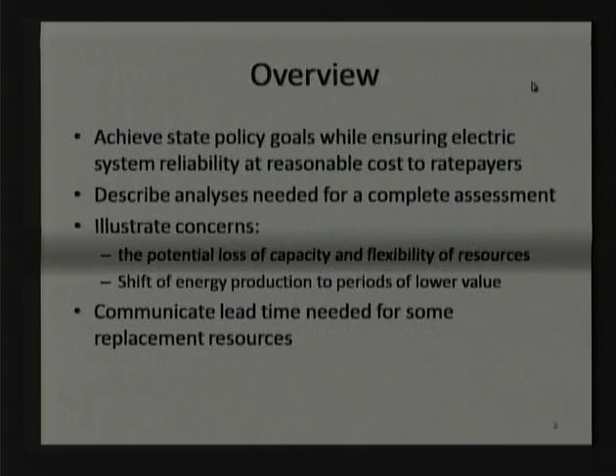Well, I keep turning this the wrong way. So just a little bit about balancing authority areas. 9 balancing authorities exist within California. 5 are fully within the state, and 4 are centered outside of California.

Essentially the western interconnection - there are 3 interconnections throughout the United States. There's an eastern interconnection, a western interconnection, and Texas. California is part of the western interconnection, and these balancing authorities are essentially areas where the operator must manage supply and demand instantaneously. It says here minute to minute, but essentially it's an instantaneous balancing of load with resources.

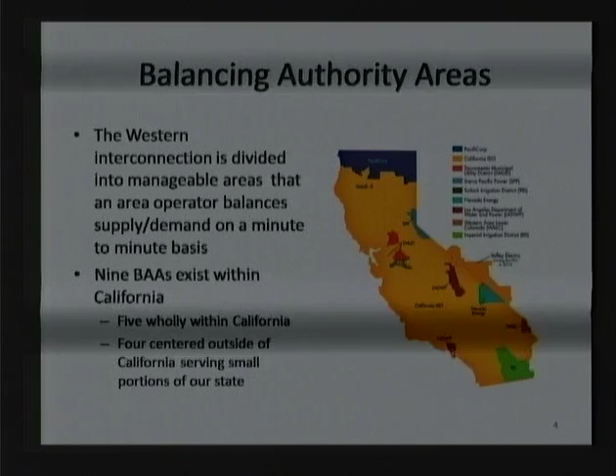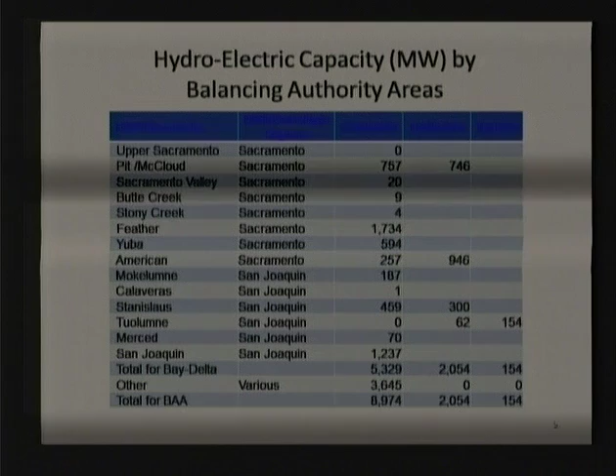This is just a slide. I won't spend a lot of time on this, but it summarizes the hydro capacity within various balancing authority areas. You can see the amount that would be within this Bay Delta plan, about 7,500 megawatts in the state, 5,300 megawatts in the ISO's balancing authority.

So I'm going to talk just a little bit about some of the studies that we currently do, at least from the electric system perspective, and Dr. Jassie's going to get into more about the specifics of how we have to model hydro within those studies and how that affects those studies.

So typically electric system planning has focused on energy and capacity to meet demand. But as we know, things are changing. Load uncertainty combined with increased penetration of variable renewable resources creates a need for flexible resources in addition to just energy and capacity.

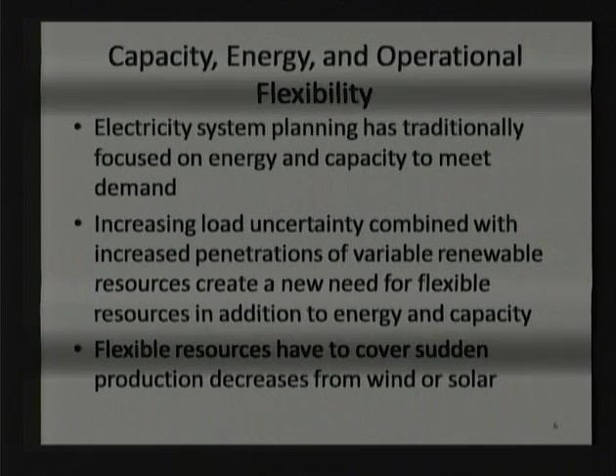Flexible resources like hydroelectric resources have to cover the sudden production decreases from wind or solar. Of course, all of this is even further complicated by things like the loss of plants that are retiring due to the OTC policy, air regulations. We see that a lot in the LA Basin, and we're going to start seeing that more in other parts of the state. And then, of course, potentially loss of maybe some hydro, depending on the outcome of this process.

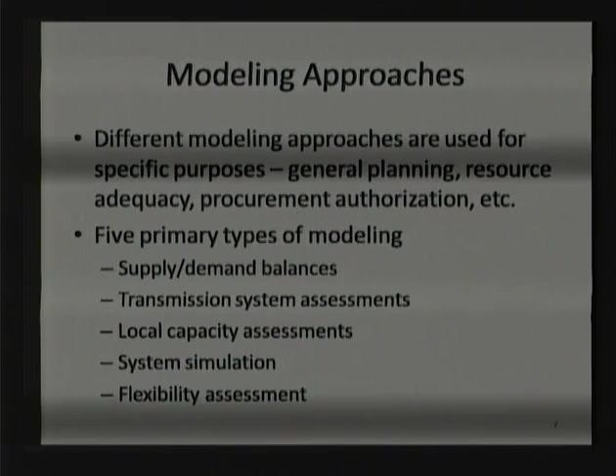I'm going to go through each of these specifically, different modeling approaches for specific purposes - for general planning, for resource adequacy, procurement authorization, et cetera. There are 5 primary types of modeling: supply demand balancing, transmission system assessments, local capacity assessments, system simulation, and finally flexibility assessment.

So supply demand balances, this is probably the simplest from a modeling perspective. Basically it's an annual process. You may see from us every year from the ISO a summer assessment. The California Energy Commission conducts a summer outlook, and really it looks at the summer and just ensures that there are sufficient resources to meet the expected peak demand, plus a reserve margin of about 15 to 17%. That accounts for things like higher loads than forecast and resource outages. So we look at that for our balancing authority area, and the Energy Commission looks at that throughout the state.

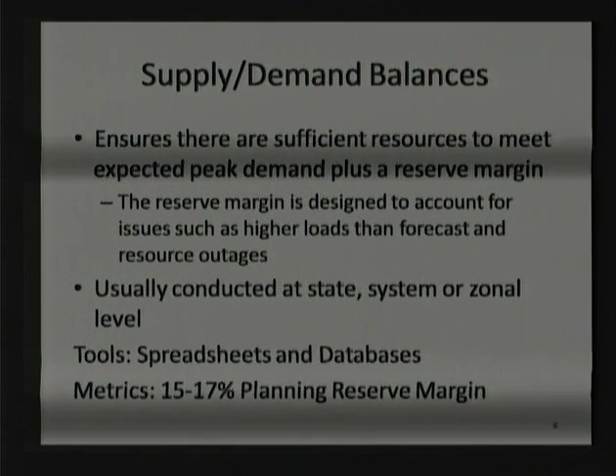Transmission system assessment - I'm just going to take a moment here and talk about the transmission planning process. We don't have a specific slide on this, but this is probably the best slide to talk about it. At least for all balancing authority areas, they do this. I'll talk about the ISO's balancing authority process.

Our transmission planning is a 15-month overlapping process. It starts in January of each year, looks out 10 years, and then it's taken to our board in March of the following year. So we conduct that transmission planning process every year. At this point, we're finishing up the 2012-2013 process that we'll take to our board, but in January we're starting the 2013 to 2014 process. So we're always looking out 10 years.

There are specific components to that. The most important, and that's really what these 3 bullets point to, is the reliability assessment in order to meet NERC and WECC standards - those are the reliability organizations that we have to ensure we meet those standards. We also do economic assessments as well as policy studies for things such as transmission needed to connect renewables, et cetera. So just stepping through the bullet points, these are more related to reliability, which is really probably the most important part of the planning process.

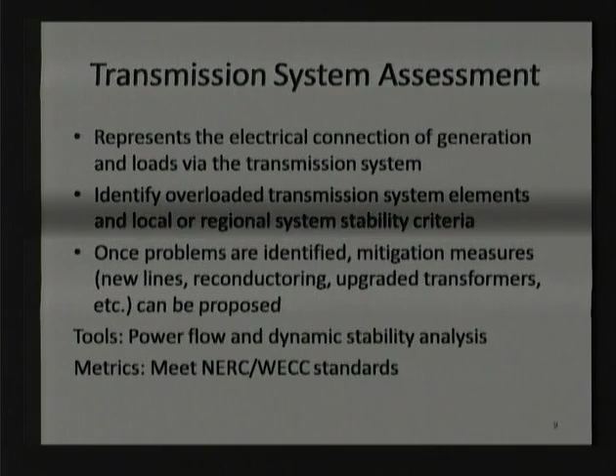So the next set of studies to talk about are on local capacity assessment, and this is to determine whether there's sufficient in-area generation for transmission constrained areas. We have 10 of those within the state. The ones applicable to the Bay Delta project are the greater Fresno area, Stockton and Sierra.

Essentially what a transmission constrained area is, what these studies identify is, since they are transmission constrained, there's only a certain amount of generation that can be imported into the area. So these studies determine how much generation is needed to meet what we call 1 in 10 load and prevent any kind of load drop due to any kind of contingencies.

There is, I mentioned before, the Resource Adequacy Program. That's a CPUC program, and the requirements for load serving entities, being utilities, are based upon the study results that come out of this.

And again, in this case, the tools we use are power flow studies, dynamic stability analyses, and essentially the goal is to prevent any load drop from contingencies.

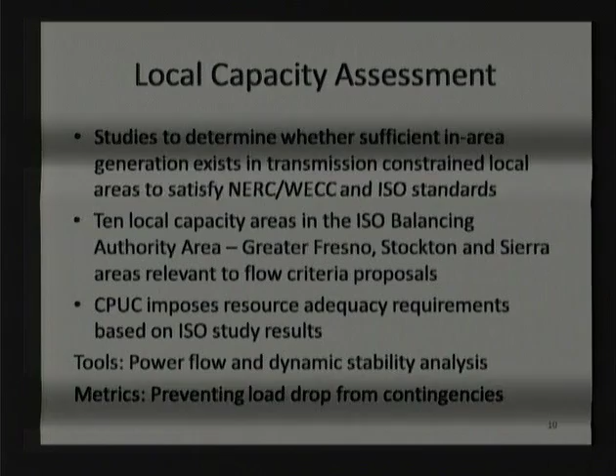So next set of studies, system production simulation. Typically in the past, we've used those for economic studies in our transmission planning process. Now we are finding ourselves using it quite a bit for renewable integration studies. Essentially, that is the type of studies that are done for renewable integration.

What those do are a number of things: assuming certain load patterns and non-dispatchable profiles, forecast how a given resource build-out would be operated to minimize operating costs while meeting the constraints, what the optimum imports are from other regions, GHG emissions, the hours of unserved load and overgeneration, and the optimum dispatch of use-limited resources, and hydro would fall into that category.

What we do is we look at this for 8,760 hours per year, so we look at every hour of the year in these studies. The tool that we use for that, and many other organizations use this, is Plexos. It's a production cost model.

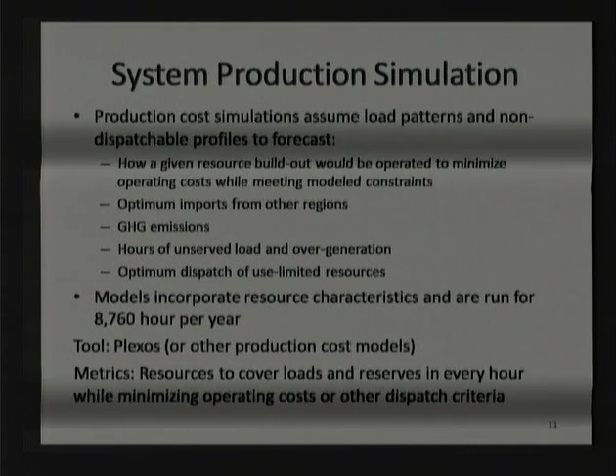And the metric on this is just to ensure that you have resources that cover loads and reserves in every hour of the year. So it's down to every hour of the year, but while minimizing the operating costs and other dispatch criteria.

So we've heard a lot in the previous panel, and we'll be talking more about it in our presentation, is flexibility assessment. This is something that we've been talking about now more with, as renewables are integrated into the system, we need flexible resources in order to meet the variability of the renewable resources.

So the focus is on whether the resources are sufficiently flexible to meet operating needs. Typically we've looked at meeting gross load, meaning peak load, and now with renewables on the system, we've got some graphs later in our presentation that will really illustrate this more. So it may not be clear now, but it will be once you see the picture. We now shift to looking more at a net load basis versus gross load.

And the flexibility assessment determines whether we can meet that net load with available resources. We find, well, we'll talk about it later on in the presentation, but we're continuing to evolve in the way that we determine what these flexibility needs are.

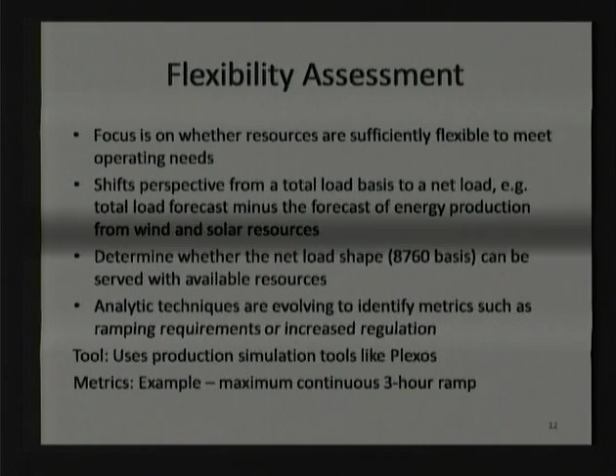Plexos is, again, a tool that we use for flexibility assessment. We just have in there as an example of a metric what a maximum continuous 3-hour ramp is. And again, as you'll see in the graphs later, where with net load, we see some ramping that we've never seen. We don't see now in the system, but we will in 2020.

So this is sort of where we'll transition into what Dr. Jaske's going to talk about, and that is just how we have to integrate our planning tools, electric planning tools, with water flow modeling. And that, quite honestly, water flow modeling is probably the most difficult part of any of our production cost simulations or flexibility assessments. This table highlights for each of the studies that I just went through what the interaction is there with flow criteria.

So I'm going to turn it over to Dr. Jaske now.

Good afternoon. Mike Jaske, California Energy Commission staff. As Dennis said, the purpose of this chart is to try to start intersecting these stereotypical analytic techniques that have been long used in electricity planning with what you're grappling with in this water quality proposal process. This chart is trying to begin to intersect each of these 5 techniques with different dimensions.

That could stem from your proposals or the proposals that are being talked about in this process, and then the degree to which they actually, we think, influence the electricity system. And this is all prospective.

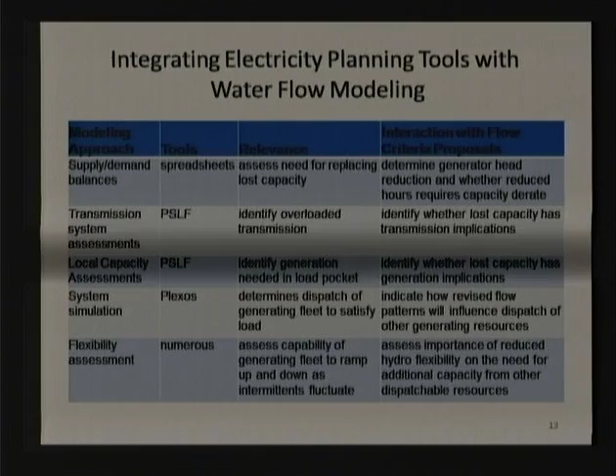Which reminds me, another fundamental unknown from our perspective, and the chart that Dennis used that talked about capacity values in the different river basins and overall hydrologic basins, is the extent to which your proposals involve all the upstream hydro facilities. We frankly don't yet fully understand whether your flow criteria proposals are limited to the RIM facilities or whether they directly or indirectly would apply to the hydroelectric facilities upstream from there.

And I think we find it hard to believe that the upstream facilities wouldn't be affected even if they aren't directly part of your regulatory process.

Of course, system simulation is one technique to reveal the nature of how your flow criteria and the shift of water from months where it's coming down the reservoir or through the watersheds from rainfall or snowmelt, and whether it can be retained in reservoirs for later use - that the previous panel talked about - that's a modeling technique that will help reveal the consequences of that, and to our knowledge, alternative flow patterns haven't been assessed yet.

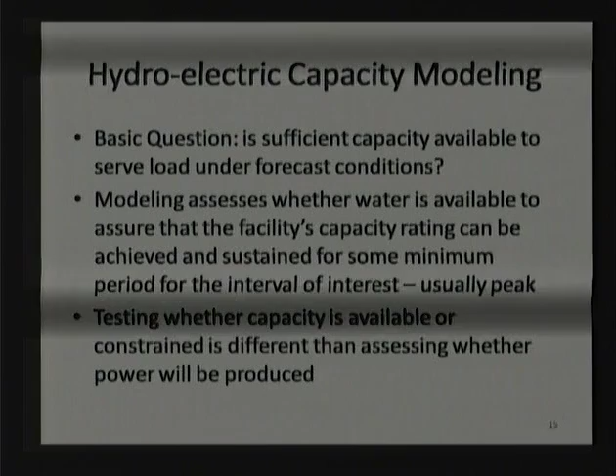Can you keep moving that? Thank you.

So looking at energy modeling then, another whole set of questions is, how much energy are we going to be able to get out of a facility over a given period of time? The CalSim model is configured to operate in months, so months is a convenient unit of time to talk about.

Clearly, the history of the industry is to store water behind reservoirs and delay the use of that water for generating purposes. As indicated by the prior panel, there is a value to that deferral of usage, both in terms of reliability, using it when system peaks happen in July and August, as opposed to April, May, June, when the water comes.

And there's a value question also, which is less of an issue, frankly, from the energy agency perspective than the owners of those individual facilities. We're probably a little more reliability oriented, but it is a really important dimension of this.

We tend to divvy up resources into these three categories: run of river, which obviously has little, if any, reservoir storage capacity; those that are dispatchable; and then in some limited instances, pump storage, which are generally artificial but sometimes natural.

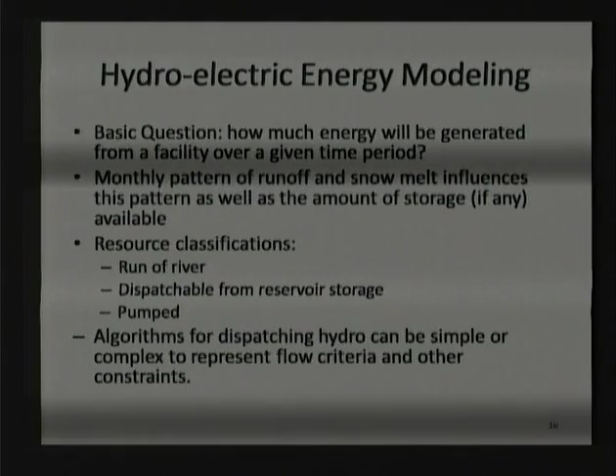In the production cost models that I'll get to in a minute, the algorithms for dispatching hydro for those resources that are dispatchable range anywhere from complex to simplistic, or even almost non-existent if you hardwire in a historic pattern, like I mentioned, which has actually been frequently the case for many studies. I think I've already mentioned this whole idea of average and adverse patterns from history.

One of the problems in modeling dispatch is the big disparity in operating costs. The marginal operating cost for hydro is near zero if not zero, versus any other resource which has some marginal operating cost, anywhere from lowish to extremely high. Combustion turbines, as talked about in the earlier panel, you don't want to use too much since it might cost 15 or 20 cents a kilowatt hour to crank one on, and they're not flexible as individual units. You have a whole string of them, you can turn different numbers on or off, but it's really an on or off situation. Other resources like hydro are much more inherently variable.

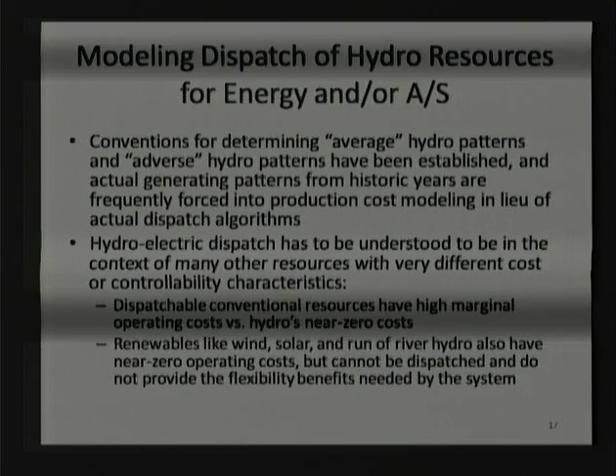So what are the consequences of changing the annual pattern of generation? Forgetting the first bullet for the moment, which I probably should have put last, clearly at the most crude level, some sort of 30 or 40% unimpaired flow criteria is going to move water from traditional summer usage to spring usage.

What is that going to mean? It's going to mean less value. Loads are lower, spring is a high production period from the northwest, so we can get a lot of imports that are relatively low cost. And inherently, power generated in that period of time will have a lower value per kilowatt hour than in the summertime.

And if we get to the point where in high hydro years or particular meteorological conditions you actually get a big pulse of water coming down, you may end up spilling some of that water if flow criteria require that it just pass on through. So there will be an energy loss if that happens.

And then, of course, climate change will possibly extend the range of conditions that has to be dealt with, beyond the 80 or 100 years of hydrologic record. It's not completely clear that climate change is going to create more extremes, but it may push us into a different proportion of that distribution than we're used to having.

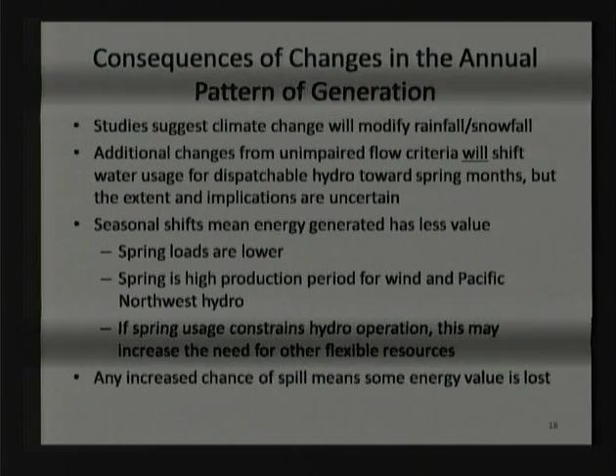I think in the interest of time, I'll just skip that slide.

So a little bit more about capacity ratings of facilities. At least our initial view is that we can't see how shifting water from summer to spring does anything other than decrease summer capacity, but it won't increase spring capacity because the capacity of the facilities are fixed. The only thing it can do is potentially lead to a different use of that capacity, maybe more energy out of that capacity, but not more capacity. So from a month-to-month perspective, we're essentially going to lose some amount of hydro capacity. The only question is, is it a little or is it a lot?

I think our previous panel made the point that summer months are the traditional month of system stress. Peak demand has been the condition under which most planning's been done, but that's evolving due to the introduction of renewables and the intermittency characteristics of the most prominent of them, wind and solar, particularly photovoltaic solar. That's introduced this whole notion of the need for flexible capacity, and we'll have the whole last portion of our presentation talking about flexible capacity issues.

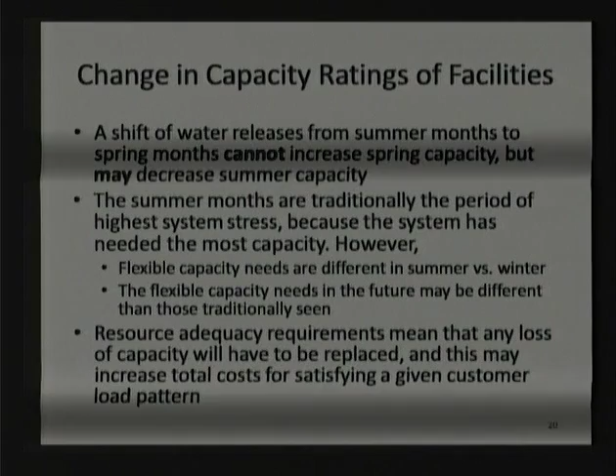Again, our previous panel hit some of these same points, but the options, if there should need to be replacement of capacity, are generally these: natural gas power plants, which are clearly much more expensive than hydro and introduce both GHG emissions as well as the issue of criteria pollutants and finding offsets and all of the other interactions with costs that other players in the economic system have to deal with as well.

Storage, again, hydro has been the preeminent example of that, and the industry is working hard to move into batteries and electrochemistry, compressed air kinds of devices with flywheels, all sorts of exotic technology, which is still at this stage very expensive and with unknown lifetime and limited capabilities compared to the resources the electric system has been used to having. And demand response, of course, is one of the options for moving load around.

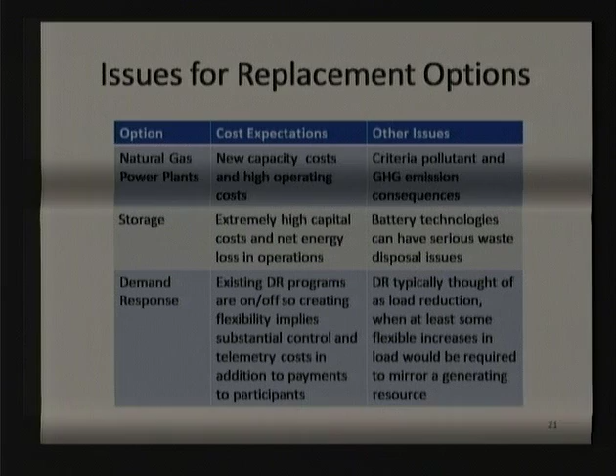Demand response has been predominantly focused on summertime conditions and peak demand, using air conditioner cycling and sometimes interruption of industrial customers to trim load and reduce the need for peaking resources. But there's probably limits to which end users can be expected to have their use of electricity interrupted or dialed down. I'm not quite sure whether we can get beyond the current 3 or 4% to the 10 or so percent that some people are talking about as a goal. But that's at least a point of discussion - can we get to that higher level, and what kind of technology might it take to do that.

I'm going to wind up with this slide that talks about some specifics of where hydroelectric capacity is located, how that matches up to other capacity in these areas, and some observations about the issues that may reveal. So here we're looking at things from a local capacity perspective.

There are 3 of the 10 areas that Dennis talked about earlier that have substantial amounts of hydro capacity. Generally speaking, these are starting in Central Valley cities and extending up into the foothills where the resources are, and they reveal the pattern of the electric system having transmission from hydro down into the valley cities, and not very good cross-links between these areas. That's why they're transmission constrained.

So Stockton area, as an example, has a little over 200 megawatts of hydro nameplate capacity. The total capacity in that area is about 620. The ISO's analysis of local capacity requirements, which is what category C means, is a little bit less than total capacity. So you might think things are okay.

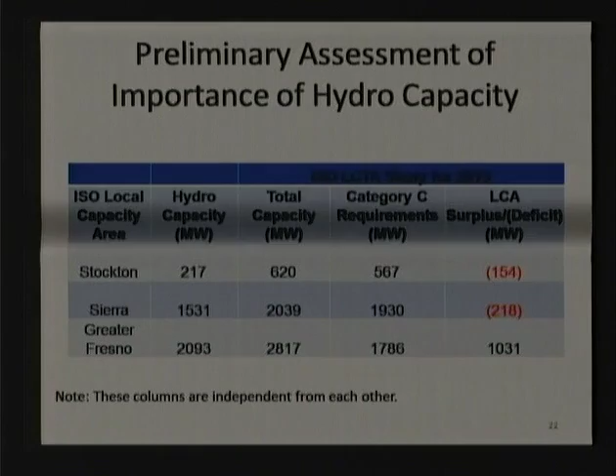Do you have any idea what the numbers would look like based on the time when you get to completion of the renewable portfolio? I don't think I'm aware that ISO has gone done that analysis for 2013. We just about a year ago, for the first time, pushed local capacity requirements out to the 10-year time horizon. We did that in order to evaluate the consequences of OTC retirement.

So that was mostly focused on the coastal areas, Greater Bay Area, dealing with those old steam plants. So these Sierra Foothills areas were not examined, to the best of my knowledge, with that 10-year forward look. We only do it one year ahead.

So would it be fair to say that these numbers are quite possibly a better scenario than you would have at the completion of your renewable portfolio demands? Even simply from modest load growth, they'd probably get a little bit worse, because the motivations to build capacity in these areas are not very large.

And one thing, let me say. Can you explain what you just said?

Motivation that we build capacity is not there. We have, as the previous panel said, a sort of partly competitive electricity industry. We have the IOUs who were incented to divest themselves of the fossil units, many of them the OTC units that your policy deals with. They kept the nuclear units, they kept the hydro units, partly because the water usage aspects of them were so complex that implementing them in a competitive ownership setting seemed daunting. So PG&E is the owner of a lot of the capacity we're talking about, and of course, all of the publicly owned utilities that NCPA represents, a big collection of them.

There are no mechanisms right now that direct generators to build capacity in particular areas. There are no incentives for generators to build capacity in areas where capacity is short, such as this chart reveals. So that's why we're considering pushing resource adequacy assessments into the planning horizon, so that we can start providing signals to generators to build where we need them to build. Right now they build where it's convenient and cheap for them, whether we want them in those places or not.

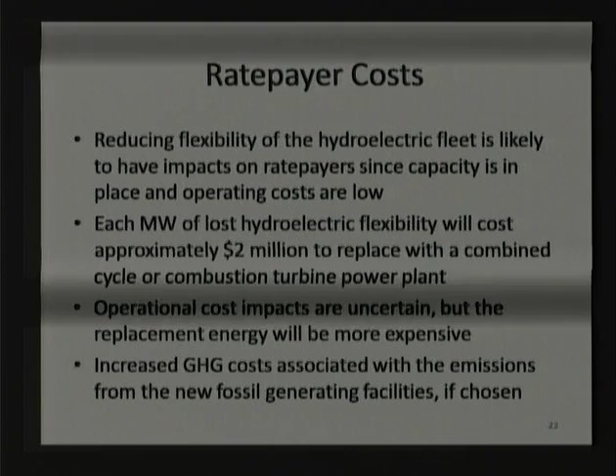It's also likely that the replacement energy will be more expensive. And then lastly, there are increased greenhouse gas costs associated with emissions from the new fossil generating facilities. So basically a variety of different factors are likely to raise ratepayer costs to the extent that hydro production shifts in time or capacities are reduced.

In terms of the flexibility to integrate renewables, aside from generating energy, hydroelectric facilities are dispatchable, respond quickly, and can provide ancillary services like regulation, which was talked about earlier, but also load following — the ability over the course of an hour to move up and down as load changes. Part of that load following definition is still being defined. For example, there could be a difference between a 3-hour load following requirement versus a 2-hour requirement, which then plays into what the impacts of the flow restrictions are.

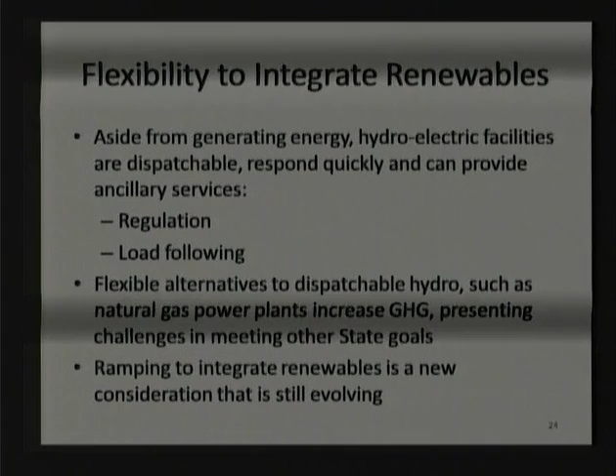These particular flexibility studies are new. The first study efforts really began in 2010, and as a result of that 2-year process at the Commission, the ultimate determination was that the studies were too uncertain to be used for procurement purposes. We're re-looking at it again in this long-term procurement cycle, with modeling results expected in March or April of next year and a final determination at the Commission by the end of next year.

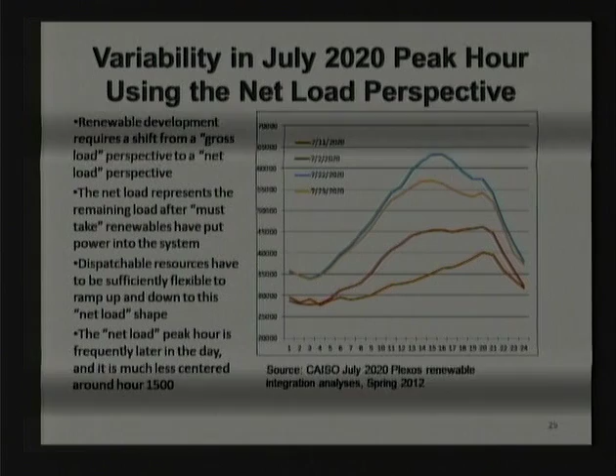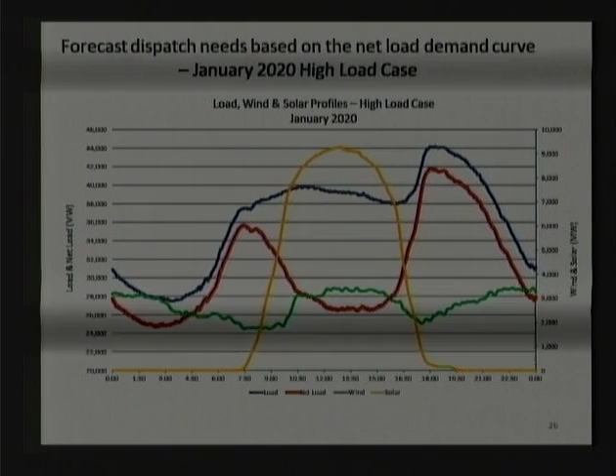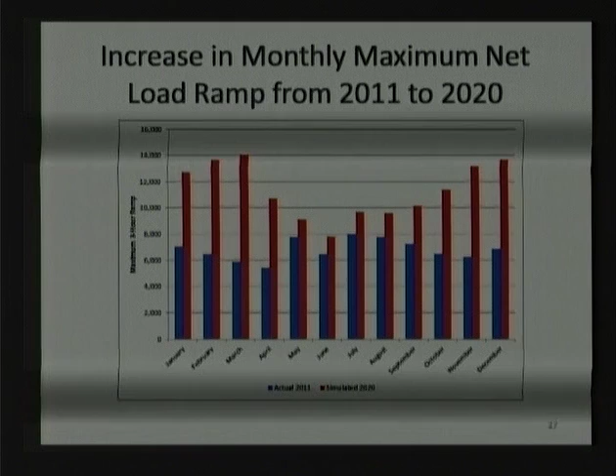In terms of the maximum monthly load ramp, currently the ramps are relatively consistent throughout the year. They vary a little bit from about 5,500 megawatts up to about 8,000 megawatts. What we're seeing is in the forecast for 2020, the summer ramps are maintaining roughly their relative duration and size, but the ramps are radically changing in the shoulder months, so basically September through March. So again, just a much different system is what we're forecasting in the future.

To summarize those points, supply variability is increasing at the same time as the flexibility of the fleet is decreasing. The preliminary studies from the 2010 long-term procurement plan showed a need of about 4,600 megawatts of new flexible resources once you retired the once-through-cooled power plants. The current assessments show that about 3,000 to 5,000 megawatts, because of the OTC policy, will need to be replaced in the LA Basin, Big Creek, Ventura, largely in the southern part of the state. But that still leaves a net deficit of the total amount of flexible dispatchable resources.

What impact hydro production will have on this, we don't yet know. Just to illustrate, currently there's about 800 megawatts of wind and solar on the system. By 2020, that grows to 13,600 megawatts. So we are getting a lot more replacement resources, but those resources are variable.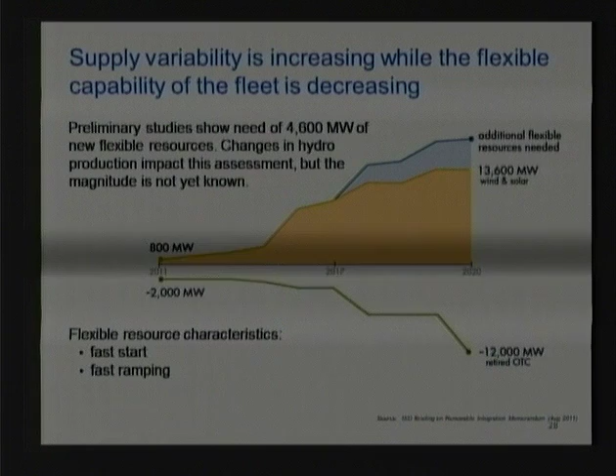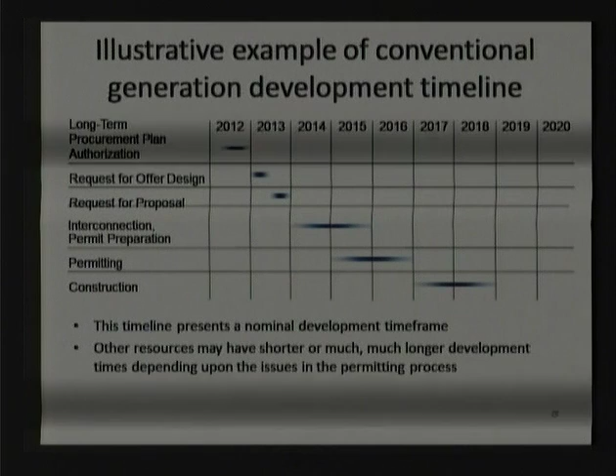As was talked about a little bit earlier, conventional generation can take up to about 7 years, on the shorter end about 4 to 5 years, and if we pay a lot more money and do it really quickly, it can be done in only a couple of years, but that can have other unintended consequences, like the generation getting sited in a less optimal location, or having to pay a lot more money to get the capacity online. Other resources such as demand response, energy efficiency, storage, small rooftop solar, may take only a couple of years to get online, but we're still talking, generally speaking, a couple of years, not just months or days.

In terms of the flow criteria proposals, it's critical to understand the full implications of the alternative proposals on the use and capabilities of hydroelectric. Again, the system operation exclusive of hydro changes is changing radically over the next 8 years. Hydro changes just add one more level of uncertainty and complexity to that.

And I think, just to summarize on this point, the energy agencies will need a sufficient amount of implementation time to enable the electricity infrastructure planning process to identify, procure, and construct replacement options, particularly if we want to do it while minimizing overall costs and considering the other state goals and objectives.

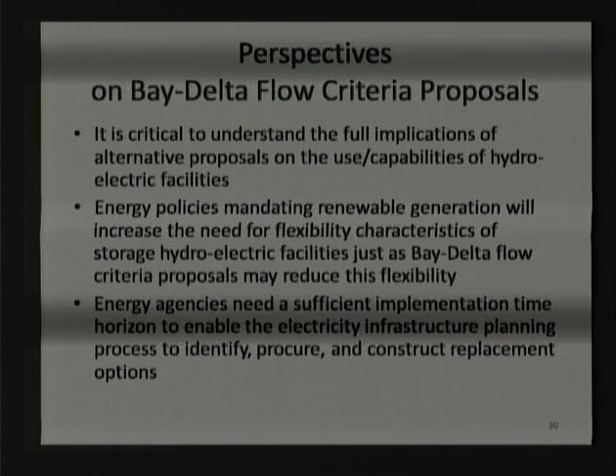Do you have any additions to natural gas, increased storage, demand response as alternative sources to look for? There are many different sources. Touching on the local area question, right now many of these programs are not geared towards having savings in a particular area for a variety of reasons. Essentially, all ratepayers in one territory pay for these demand response and energy efficiency programs, so if they were focused in a certain area, there are justice questions raised. It's something the Commission is starting to look into, how programs can be more tightly focused.

One other point: this is a forecast for 2020, and there are some assumptions embedded in there that could be changed. Right now, many of these programs are focused on current peak reduction, and haven't necessarily been refocused to look at what the time of system stress will be in the future, which could change overall availability of those resources, or could mean more resources that lessen the reliability impact. A good example is electric vehicles, currently focused on shifting charging away from the peak hour into the evening. But if that charging period was shifted to the middle of the day in winter, where we saw that large dip, it could help by increasing load in the middle of the day, which decreases that ramp.